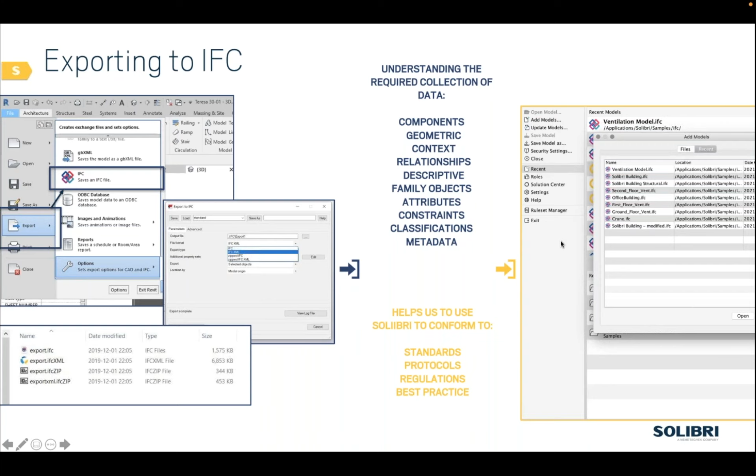So this is a really important slide to consider, because when we get into the Solibri Office workflow, that's the first point: take our IFC and bring that into Solibri. It might be multiple models, we might be doing a federation process here, but fundamentally what we end up with is a Solibri model project, and the project itself is optimized.

We've now created relationships between components. We can use classifications and work within the Solibri environment in a more seamless way with the data we've been given. Some of the initial basic things you can do: visualize, navigate, merge, federation, coordinate our models.

But where Solibri comes into its own is with classifications, fundamentally there to help us identify what we are looking at, see the wood through the trees, and actually be able to identify both components and spaces, no matter what we want to classify in our models.

It could be make the architectural model blue and make the structural model red, for example. I want to see the differences. I want to see where things are poking out. I want to do fire stopping so that I can see the ratings for the doors and the walls. There are tons of different ways that you can classify what you've exported and taken into Solibri.

It's also a huge prerequisite for the checking process, because instead of having to search for all windows and do a clash detection against all doors and all other components in that room, what we can use the classifications for is to already group the windows together based on type, or based on whatever you want to base it on, in terms of the information we've got for the windows.

And we can then run a check that's built based on the classification. So it's not integral, but it's really helpful.

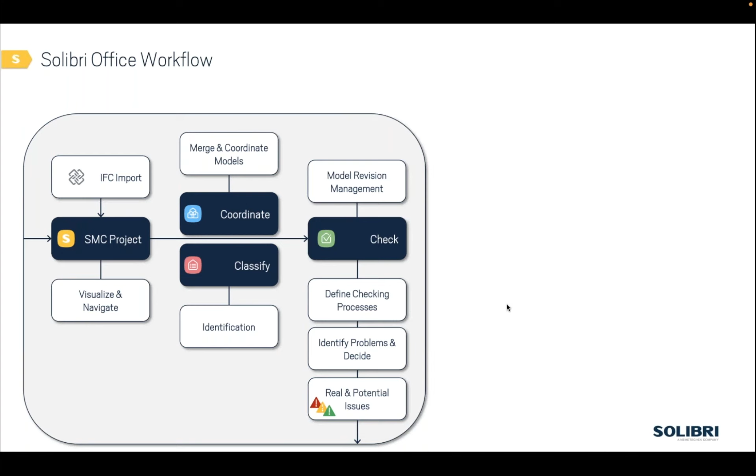Once we've done our checks, found our problems, and found a series of issues, we want to communicate them to people, and you can do that a number of ways. BCF, BIM Collaboration Format, enables you to share the issues you've found back to the authoring tool so that the changes can be made in a dynamic way.

The alternative might be using Excel, which you can also do if you want reports of the bigger picture and a list view of all the issues you found, but that's going to require you to go back into the authoring tool and find those issues manually. So BCF is far more dynamic and far more interactive with all of the tools.

We've also got an API there and a BCF Live connector, enabling you to push the issues you're finding in Solibri out to issue management systems like BIM Track and BIM Collab, for example, so that others in the team and others working on this project can see the value you're getting out of the software.

One of the new things we're working on, and hopefully will have delivered by the end of the year, is a series of new fire stopping rules - we've been working very closely with a big handful of our customers to help deliver what is needed in terms of fire stopping. Egress analysis is already in the software, but I believe there's a few tweaks and changes being made, and this is all to the benefit of our API. Being able to use a third-party developer to deliver these rules in a seamless process and quick amount of time enables us to be far more dynamic to the outstanding problems in our industry.

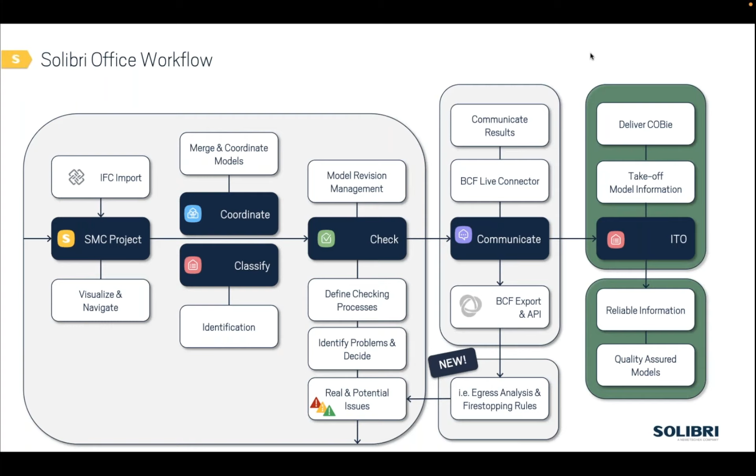So taking us right back to the very, very beginning when I said that quality is not what the client's feedback is, quality assurance is this. This is taking a process, standardizing it, and when you deliver, you're the one telling the customer or the recipient of this information it has been quality assured, and that just de-risks everything to do with your involvement. And this is a very general overview, and obviously we'll get into some detail in terms of what the checking processes are going to be, what sort of identifications can we do with classifications, which I'll jump into in just a moment's time.

So in terms of integrations with other softwares, this is a journey for us. This has been something we've prioritized this year and will continue to prioritize next year. But if any of those products that you're working with and you're curious about the developments that we've made to unlock these integrations, then please do get in touch with us, because this is a huge part of Solibri's endorsement with Open BIM and just trying to open doors and let all stakeholders on a project work effectively with what they're finding in Solibri.

So I'm going to come back to the product family a little bit later, but now I'm just going to jump into the software. So if you bear with me 1 second. Maybe a good time to do another poll whilst this is loading actually. So let me just open this up.

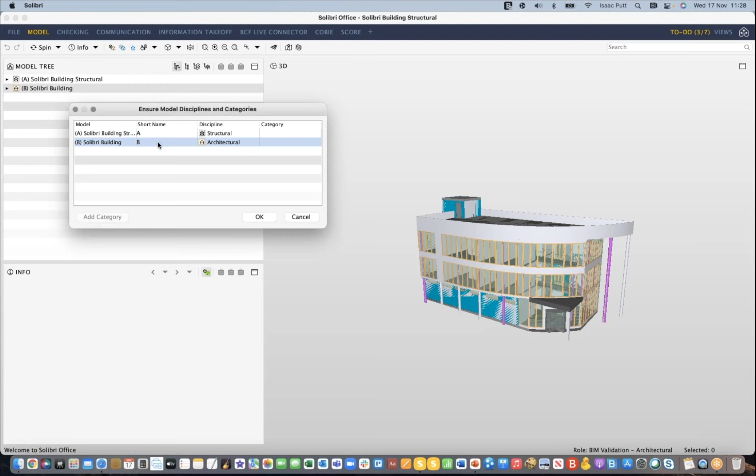So here we go. So it's loaded in our models, and the first thing that we want to do is we want to define the actual models themselves. So this little window comes up and it asks us for the discipline, the category. So in Solibri Building, I'm going to put ARC in here. Notice over in the background in the model tree, we've still got A and B, and we've got the 2 different types. And in here, I'm going to put STR. Now, when I hit OK, it's going to change. And now I have a prefix associated to the 2 models.

So if I go into the detail of these 2 models and I break this model tree down, all of the components actually have that prefix associated to them. So in the columns, we can see ARC on all of the columns as well. So there's loads of ways within Solibri just initially to understand what we are looking at.

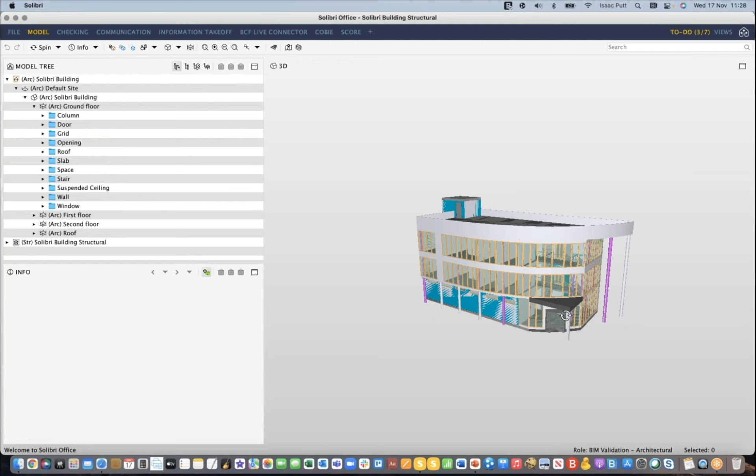If it meant that I wanted to see the ventilation model within the architectural model, I could use the tool up here to hide the roof, zoom in, and for some reason it doesn't want to show it. That's because I've loaded in the structural model and not the ventilation model. Let me load that one in as well. Here we go.

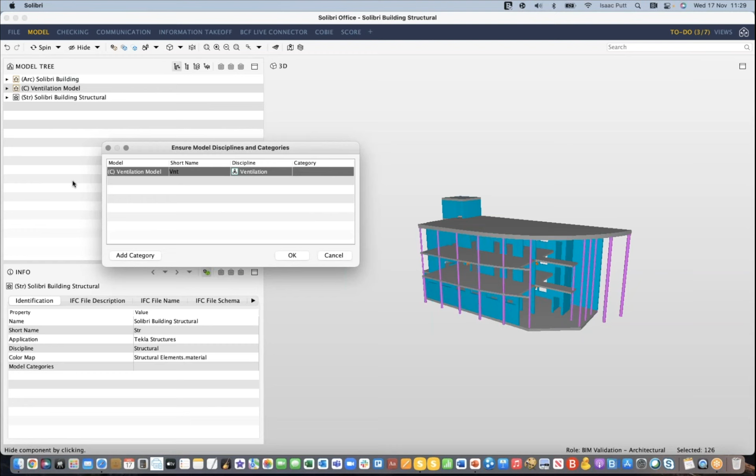I'm going to do the exact same process here. So now I have my ventilation model. I'm going to put a short name on there, and I'm going to change the discipline down to ventilation as well. And now if I want to see my ventilation model, I can. But just going back to everything and doing that same process again, if I hide the roof, now I can see my ventilation model in there too.

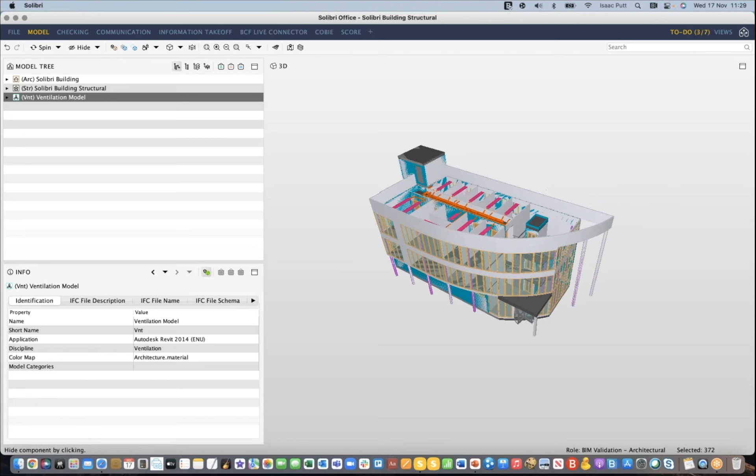And you can check the coordination of this, make sure that things are lined up correctly. As some of you may have noticed, there's probably a couple of issues there already, but nothing that jumps out at me that rules can't fix. So I can understand what I'm looking at here.

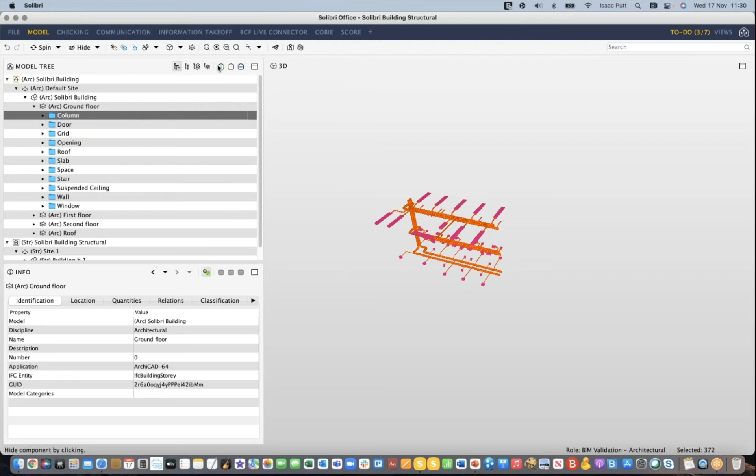There are a few ways in which you can break the model tree down. So if I wanted to see it by actual product, then I could do that as well, and instead of just filtering by the ground floor columns, I could just see all of the columns. But you're not editing and changing any data in here, you're literally just viewing it a slightly different way.

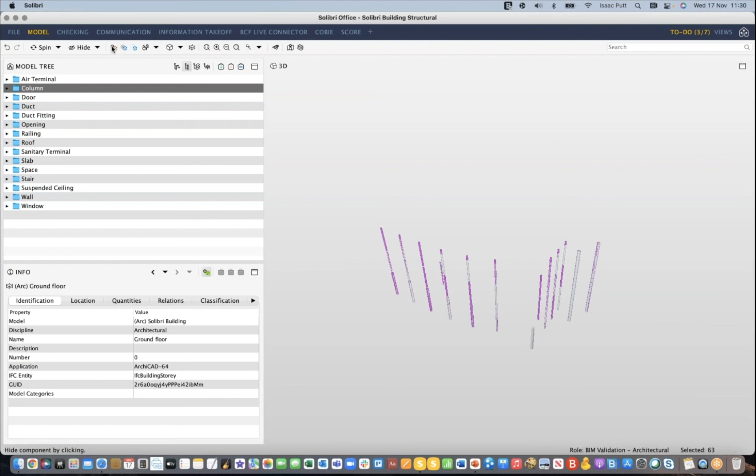And if you want to bring everything back, there's a little brown box up there that enables you to do that. You've got varying standard views, so I can do top, front, right, and quite a lot of basic functionality in here, such as give me the information. So if I click on a component, if I click on this wall here, this little information window pops up, and it gives us all of the data that has been exported into the IFC itself.

So looking for blanks, looking for information that might be missing in here can be done manually, but then you can also use classifications to define if the information is missing as well, which I'll get into in a little bit of time. But you can see where the application was, the authoring tool that this came from. You can see the location, you can see all of the data that's been exported.

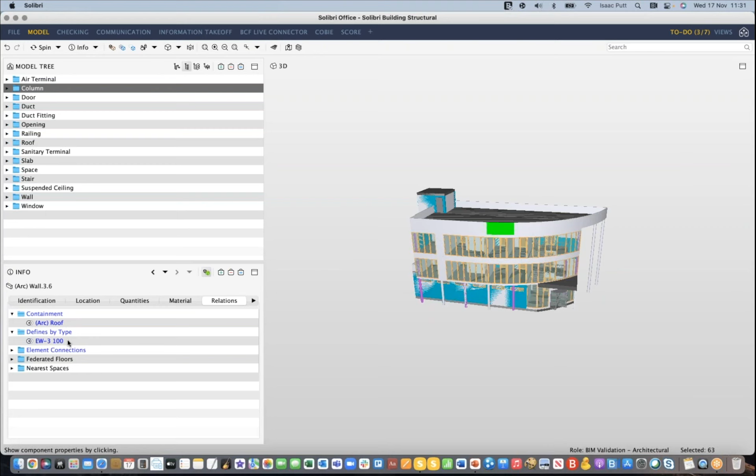But where Solibri gets clever with this is it starts to build relationships between components. So now we can see that the federated floor that this resides on is the roof. We can see that the type of this component is EW for external wall, and we can see the components that are connected to it either side, and they're hyperlinked. So if I click on this one, it takes me to the wall next door, and then I'll just move this back into the middle screen. I've got a control panel, so I can't quite see the entire thing, but we can now see the walls on either side of that.

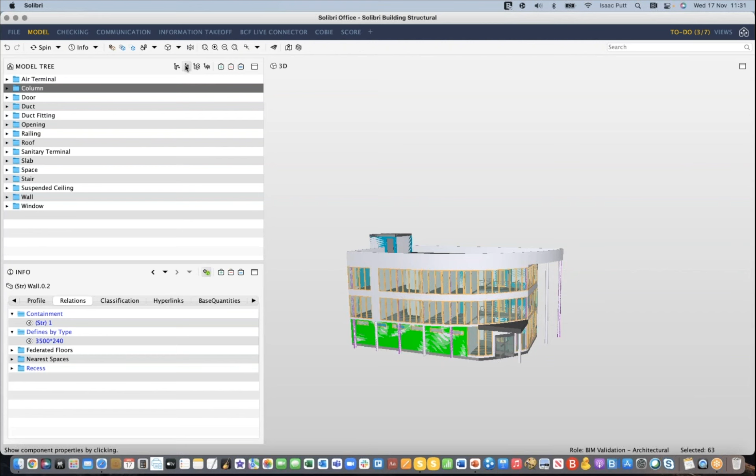And it's fine for looking at components that are touching it on either side, but if I click on this wall at the bottom, the information changes slightly. So now I can see the containment value. I've actually clicked on the structural wall. Let me just take the architectural wall and I'll show you what I mean. So now we've got the containment value of the ground floor. We can see EW for external wall. Now we can see all of the interior walls that reside and touch this one.

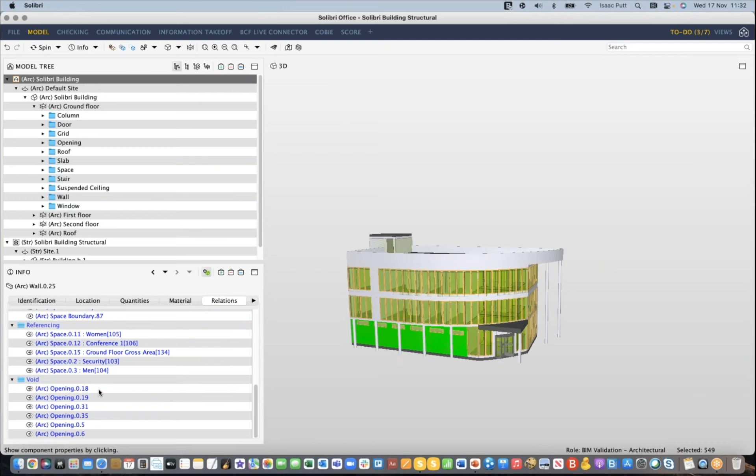We can see the spaces that are associated to this wall, what the spaces are referenced for, and then the voids. So if I click on this opening, it takes me down to the window level, then I can see the filling for the window. So it's just being able to build a picture, basically, and be able to view what we're looking at here with this model in a nice click-through, seamless process in terms of all of the information that we've got.

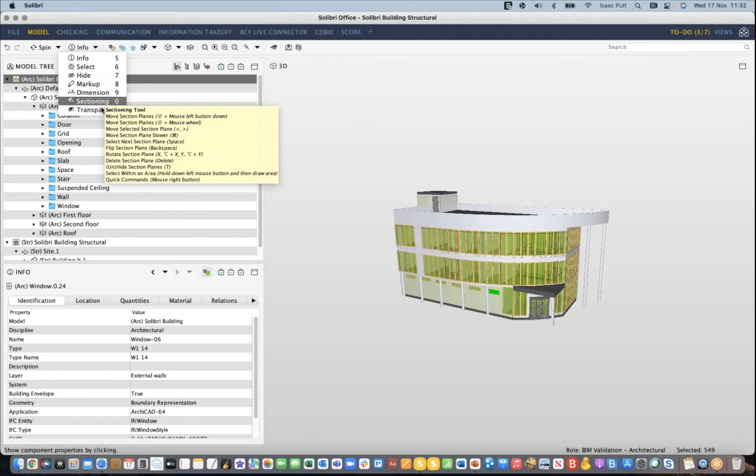So that's the basics of navigating your way through the model. You can use a VR headset, you can use a video game controller, you can mark up, you can do section planes and section boxes in this environment, you can hide components, you can bring everything back, and you can just make it look the way you had it when you first imported it without making any changes or mistakes.

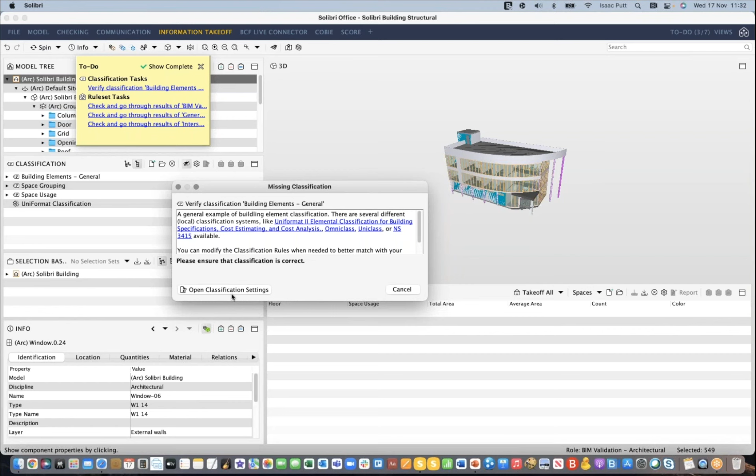So the next thing I want to show you is how classifications work. This is next level in terms of what I've showed you already. So this classification here is asking me to verify the building components for our architectural model. So if I open up this classification, I'll explain why it looks this way. So this information has been preset before we've imported the models. We're working to a naming convention here. We are specifying that if a column equals one of these types, then the name of it is a column. And that's the way that it works. Doors of these types will equal either an interior or an external door.

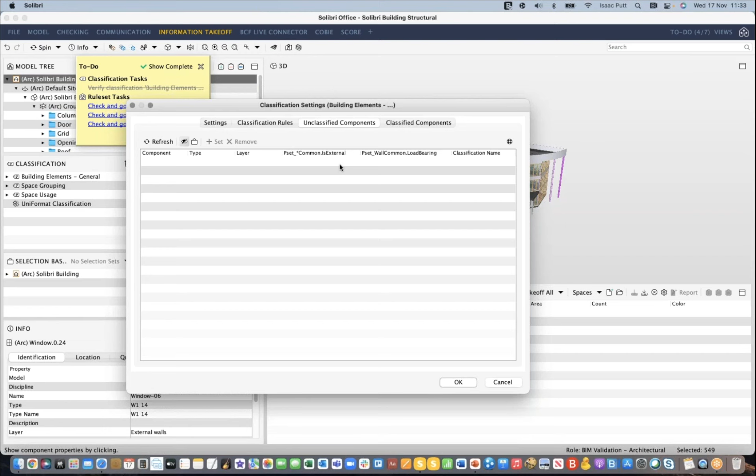Any components that are either new or incorrectly named in this model, that aren't in my preset classification, will fall into this list here, the unclassified components list. So we can already do a check to say all of our architectural components, if they're not classified or if some of them aren't classified, let's name them properly. Take a screenshot of that, get that back out of the software and get it back into the authoring tool, or you can cater your classification to take the new components if it's not a mistake and it's actually supposed to be there.

The way the rules work, nice and simple. It's just you're working your way through each component and classifying them based on this level of information: type, layer, pset values. And we can color coordinate based on what they are. So this is how the classifications are built and can be so different from each other. You know, in this case, I'm looking at all my architectural components. In the next classification, I might be, as I said before, cross-checking my architectural model with my structural model, or doing the fire stopping and all the different things that you can do.

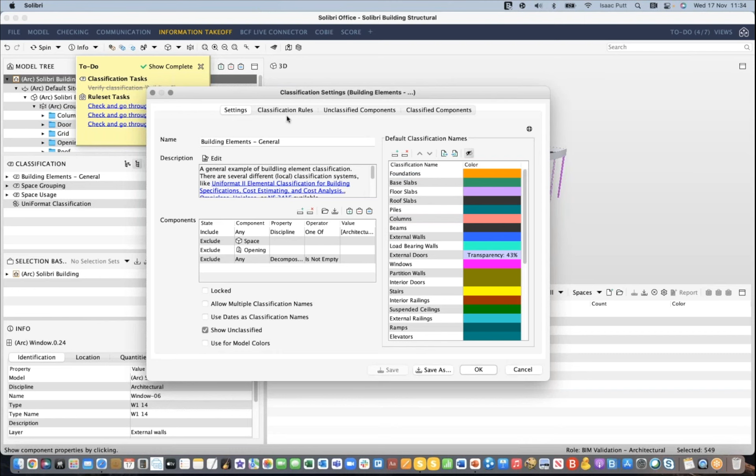So we're including all of our components from our architectural model, and we're excluding spaces and openings. You can do classifications of spaces if you want to. Anything that you have within your model, you can classify as such. So that's how the classifications work, and the rule sets that I'm now about to show you, a few of them are based on classifications. So that all pulls together nicely. You can see space grouping and space usage here, and you can drill in some of these classifications and see what the spaces are to be used for as well.

So let's get back into checking. The rule sets is the group term, so there are a series of rules within them. I'm going to handpick some of these so that we can go into some of these today, and I'll show you what it's all about.

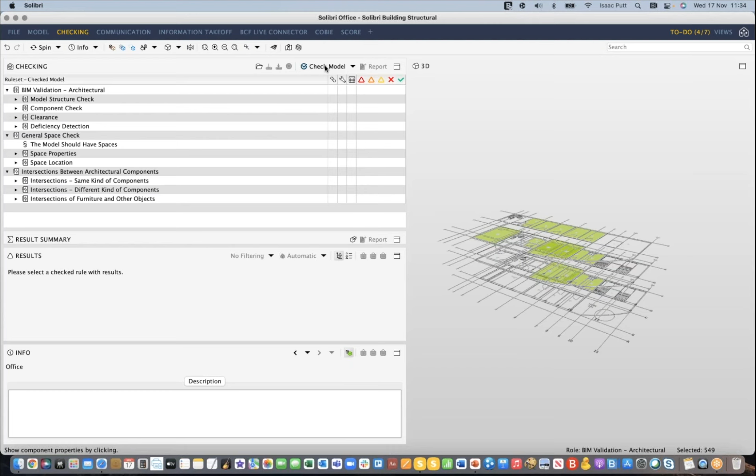I'm just going to check the model. These rules have been defined. We know they work on this model. This is our demo model, so it should work. Let's go through some of these. As you can see, as it's doing it, it's basing the results on severity, which is what I mentioned to you earlier. Some things have been automatically accepted and some things have been automatically rejected.

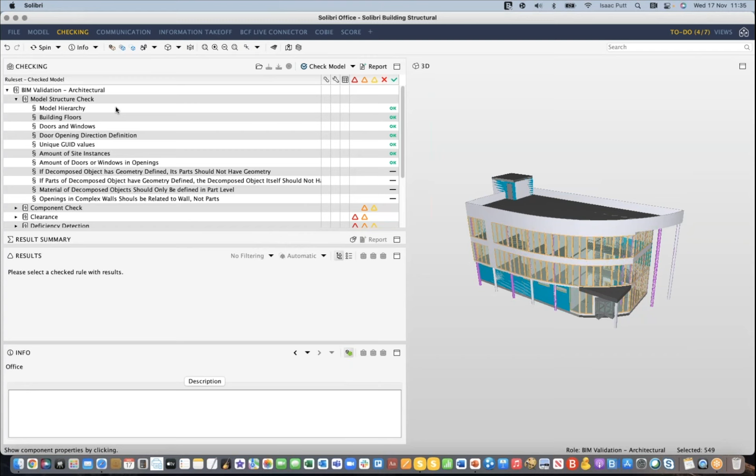So let's go into the model structure check. And this is basically just a nice, simple, standard rule that says, make sure it's got a hierarchy, make sure it's got doors and windows, make sure there are unique GUID values for all components so that there aren't two duplicates of the same. As you work your way through, I'll go straight into clearance. So clearance in front of windows.

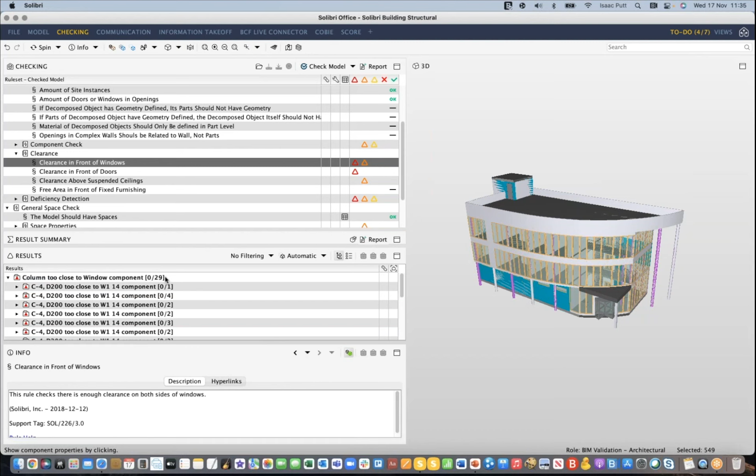By clicking on the rule itself, we've got a series of results below. Rather than seeing all of these issues listed out, it's grouped them based on what it's found. So it's found a high severity issue and a moderate severity issue. And if I go into the column too close to the window component, there are 29 instances here where the columns are too close to the windows. What it's done for us is it's put these nice dimension markers on screen. You can see the columns here and the space that it's actually checking for.

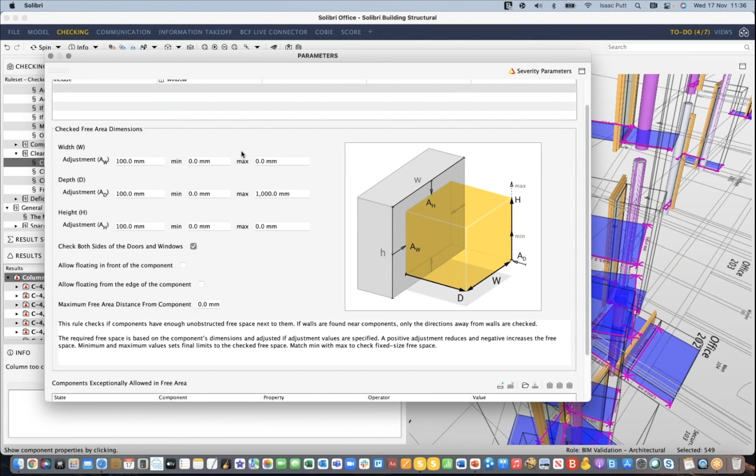If I just go into the actual rule itself, I'll open up exactly what it's doing. So in this case, this is how the classifications have come into play. We're including windows, nice and simple. This is the space, the free area space surrounding the component that's been defined. We want to check both sides of it. And you can specify a little bit of information for those that want to understand a little bit more in terms of what it's actually doing.

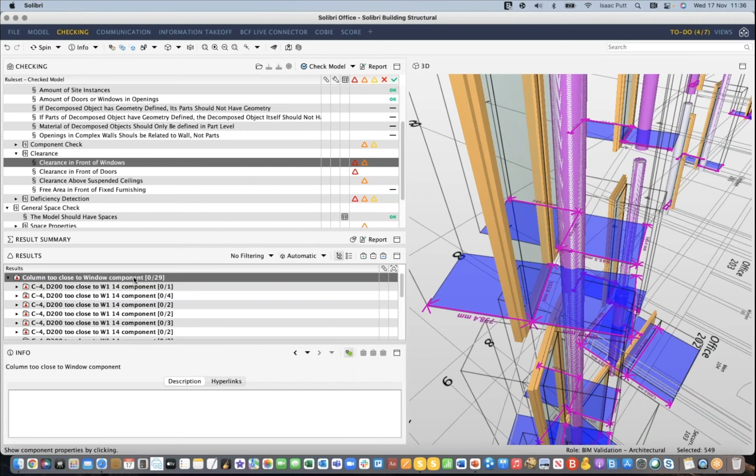And then we can have exceptions in there if we know that some components can live in that space. And in this case, there aren't any. So we're just checking that space around both windows, and it's found the columns protruding through, 29 of them, in fact. So the way that we would communicate these 29 issues out to people, typically, is get it into Excel if it's a clash. This is a soft clash, so this isn't actually physically hitting the window. This is just looking at the potential function of that window, and defining that there could be an issue.

What we now want to do is create that BCF I was talking to you about earlier, that BIM collaboration format. So in this case, this is basically it. This is the way that it looks as exported from Solibri. If you're using the BCF Live connector, then you can have these issues automatically taken into the BCF Live connector, and in real time upload them to an issue management system. But to do it manually, so I can show you what's going on, we can define the description, which is based on the top level.

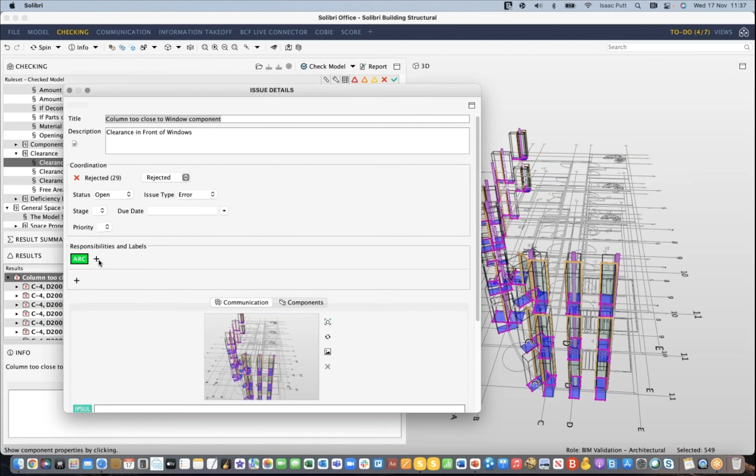So it's a little bit technical, but if I did a description on any one of these individual examples, then the description would give me the physical dimensions and physical issues of that issue. But because we're grouping things, we're just going to get a group description, if that makes sense, clearance in front of windows. We're going to reject this. We can set a status of this. We can set a due date. We can assign this to a team. We can put email addresses in here. I can put a name in here if I want to.

I can see an image. If I wanted to give an example, such as one like this, I can add more images in here, and it will work its way between the two. So you can get some nice animations out of some of these as well. And then it will also list me all of the components that are related to this issue. And as I click on these, it's hyperlinked, so it will work its way through. And that is how seamless it would be within the authoring tool to be able to locate some of these issues and have them fixed.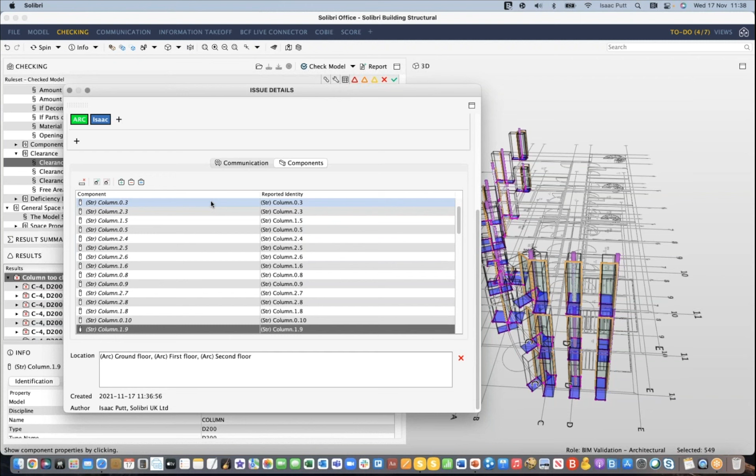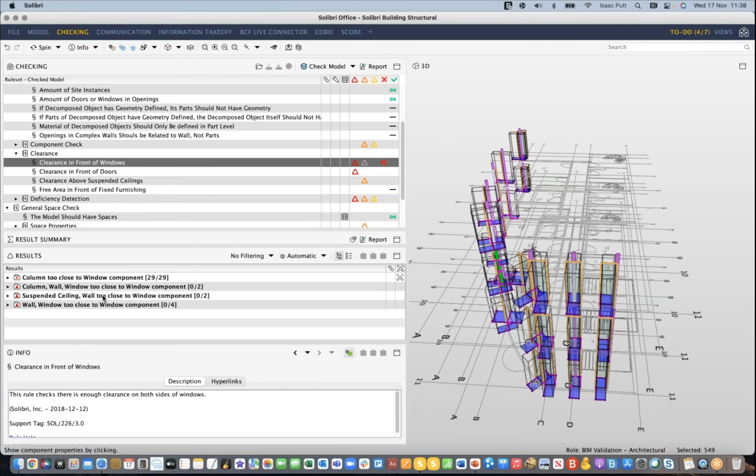It's going to tell me where these issues are located, and the fact that I actually made this slide myself. You don't need to hit any save buttons each time, because that would just take too long. So you just close it and it automatically saves it. And if I wanted to create a presentation, I could do so in the communication area, but I want to spend a little more time going through some of these rules and what they're doing. So there are other problems in here, but I won't spend too long on the same rule. Clearance in front of doors, sorry. So you can see the same thing.

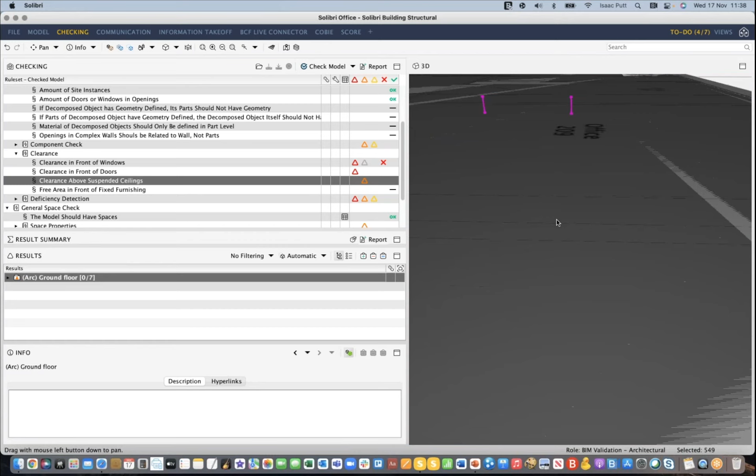So in this case here, you can see that it's checking for the clearances in front of doors. I won't bother doing slides each time because that just takes too long. You've seen the process now, but this one is checking the clearance above suspended ceilings.

So if I just show you, there are 7 suspended ceilings. If I want to make that a little bit clearer, I can actually click through these and it will highlight them for us. I can highlight them by doing it here as well.

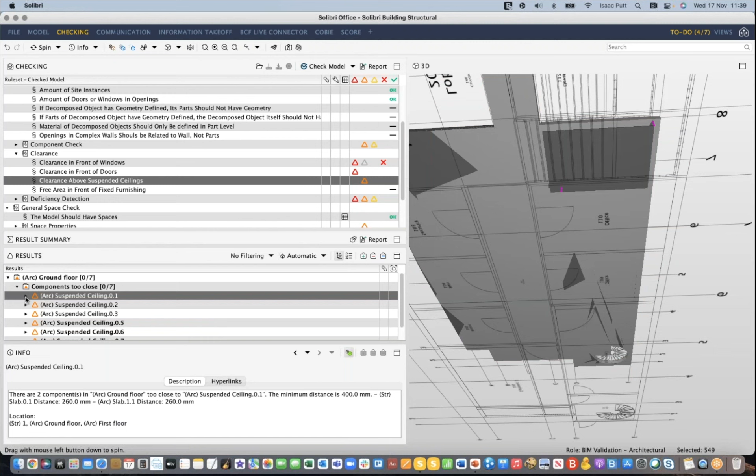That's my suspended ceiling. You get down to the detail. This is the nice thing about it, is you can actually start to work your way into the detail of the rule by just clicking through. So you get the bigger picture, and then if you want to see the real details, you can do exactly what I just did there.

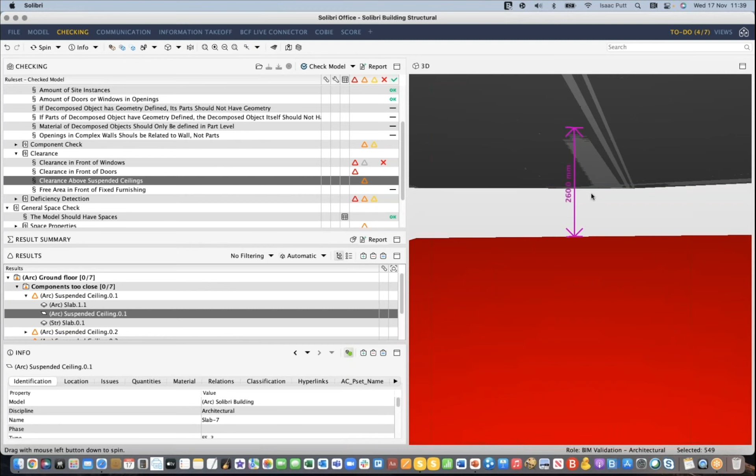So this is that single suspended ceiling, which is too close to the slab above. And there are little dimension markers. This is one of the hardest to see, so let's see if I can do it. There you go, 260 mil is the gap. Now, okay, that was a little tricky to find out, but I don't need to do that.

That's just for my own sanity. What I can do is right click on this rule, add a slide, and I can do the exact same thing. So ground floor, and I'll show you, this is the group level, clearance above suspended ceilings. But if I did this on an individual level, such as the one I had open, and I right click, add a slide, now, sorry, bear with me a second.

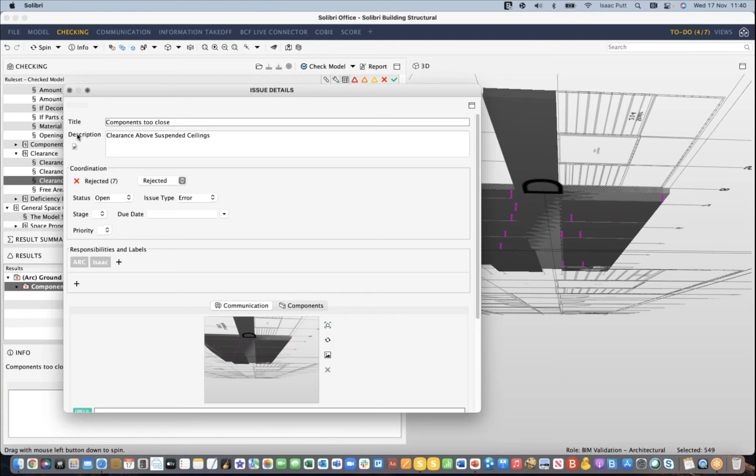Now my information's changed. So clearance above suspended ceilings, there are 2 components listed in this example on the ground floor, and the minimum distance is 400 mil. So you don't even need to articulate what's happening here. It tells you, and it can pre-populate that information for you.

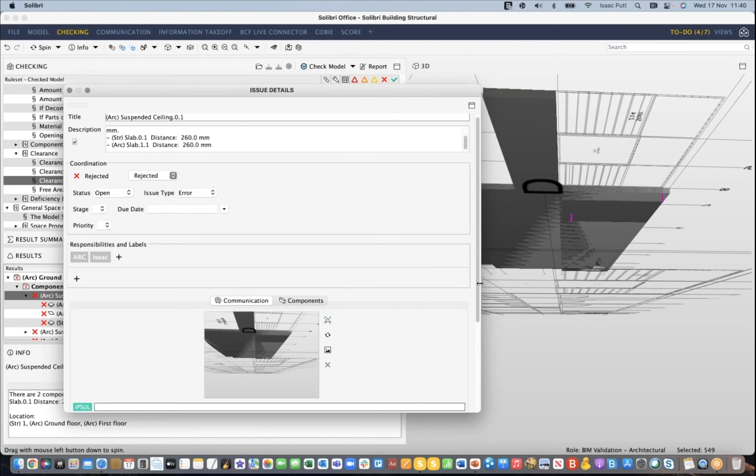So we reject this, we can then communicate this to somebody again. It's not the best image, but you can actually see the components listed here as well. I've actually got my structural components in there as well, which isn't something I normally do, but it's there.

So there's a ton of different rules in here. Let's just have another quick look at some of this other stuff. I won't spend too long on these.

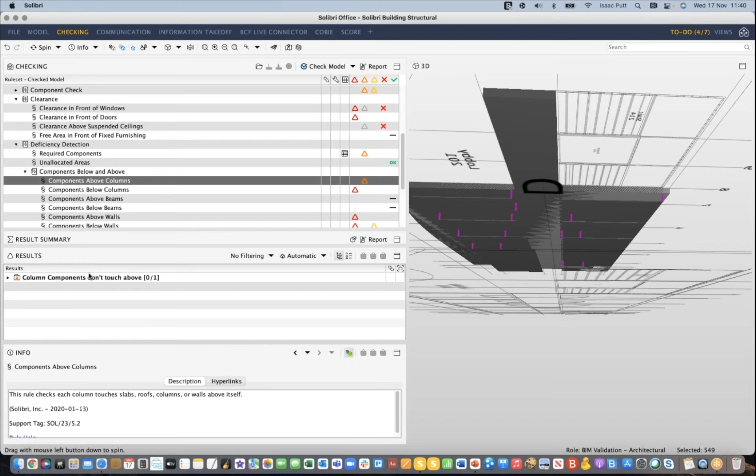So let's just check the components above columns. These columns are supposed to be supporting the slab above, and it's floating and they're not doing anything. So again, same process, I'd add a slide and I'd put that into my communication window because that's a bit of an issue. This is more sort of building regulation standard, this one.

So this is checking that there must be a swinging door next to the revolving door. One thing that this rule is doing, which is really nice, is it's actually created a radius around the revolving door, which you can define both to the space it resides in or to the entire floor.

So if I just show you the parameters of this rule here, what it's saying is check the horizontal distances between these two components, and it's allowing a maximum distance of 3000 mil. And what it's doing is it's checking the IFC door panel property, which is revolving, and it's basically saying search for a swinging value within that proximity of it.

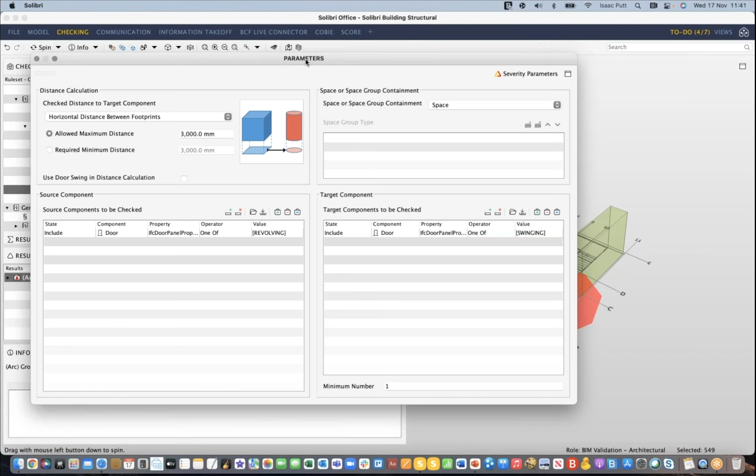Really simple. You know, when you're looking at creating some of these rules, they don't always need to be really difficult. This one here, and I'm no expert, could be defined relatively easily based on the information I know from my model itself. And that's the distance that I've got.

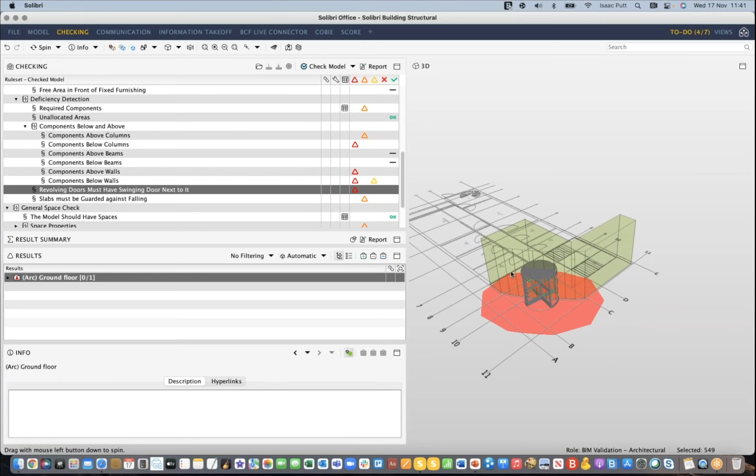I could exclude spaces, I could include spaces. I could even say, okay, if you can't find a swinging door within 3000 mil, where's the nearest swinging door, in case it exceeds that space. But nice and simple, that's exactly what that rule is doing.

So let's go into some more detail in here. So in this case, we've got some spatial validation based checks. This space has not been validated correctly, it's not been specified. You can see that the pipe shaft down here may have initially been a bit bigger, or there must have been something that was in this space that enabled the office space here to have to change. And what it's doing is it's not taking the whole global space of that area.

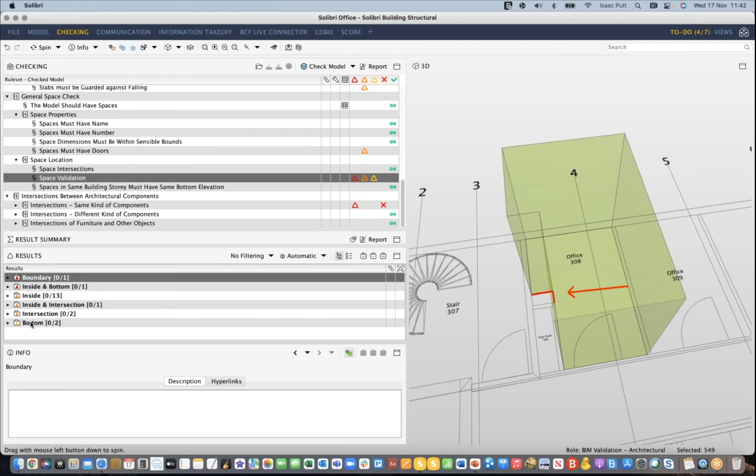It's a very small scale, but on a bigger scale that could be quite an issue, especially when you're thinking about repurposing rooms and whatnot. So there's a series of other ones in here, the exact same thing. This is basically just saying that the component is blocking the space, and that space should be longer in effect.

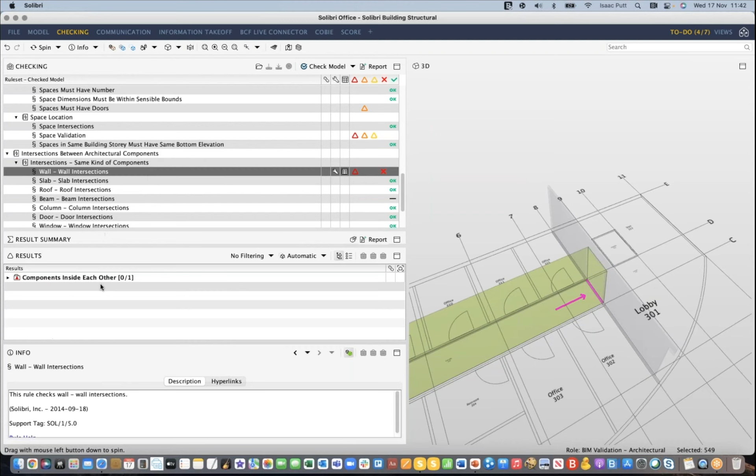So I'll get into this one. This is a nice visual just to show you, and I'm not going to show you too many other examples, and I am going to go into the rule set manager.

So this one here was actually based on a customer request. They said to us, our wall quantities are not marrying up with what they should be. And this is what they had, and it's a wall within a wall, basically.

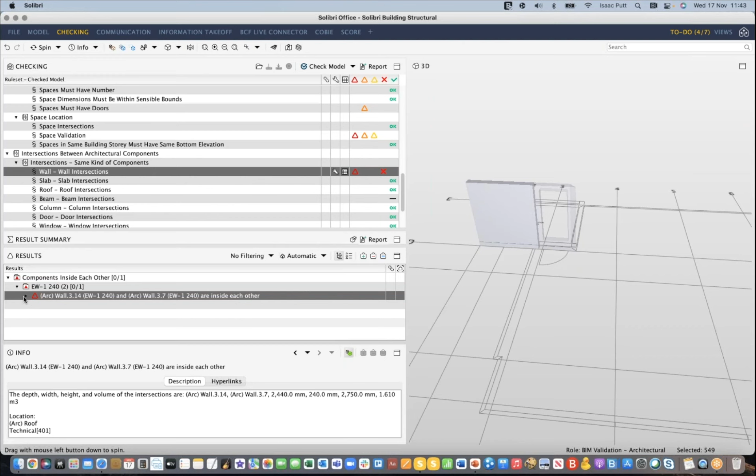So if I go down into the detail, you can see that wall 3.14 and 3.7 are inside each other. And if I just scroll a little bit further down to one of these components, you can see how it shimmers when you click on it. Visually, very, very difficult to see.

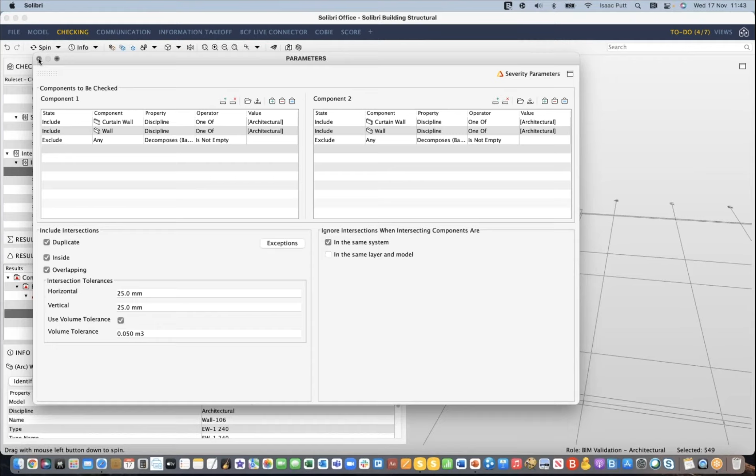Using a rule like this from Solibri enables you to just instantly find it. You don't necessarily have to say that it's fully inside of it either. You can actually specify the tolerances. So you could say that it must be a duplicate, or it must be inside, it must be overlapping, and you can specify the actual physical tolerances themselves. So really nice little rule just to make sure that your quantities are as they should be in case there are components inside of them.

So this is a whistle-stop tour of some of the rules that you can see have been run on this model, but where I want to show you is the rule set manager itself, because in here we can see what all the rules are, and this is all out of the box.

So I say to a lot of people, you can either look at what the software can do, and you can see, okay, great, there's accessibility based checks for doors, ramps, roofs, stairs, windows, etc. But you might have your own preference, your own components, and your own ways that you would want to run what the rule is doing on your own model. So don't feel that this is limited to those components, don't feel that what you're seeing on screen is limited in any way, shape or form to what it's checking as an example. It is just an example.

So you can customize these, you can create your own workspace down here for what you want to check for. Component distance, I showed you this one, you specify the components that you want to check. You've got the escape route analysis, which is obviously part of what I showed you earlier.

There's loads, model comparisons. So as you're working your way through the life cycle of a project, things might be changing, being added, removed. You're working with subcontractors or companies that are saying, yeah, that's fixed, that's fixed, but you might have actually created another problem. So using the model comparison enables you to take revision A versus revision B and check to see what's changed, both in terms of components and in terms of spaces. And we do find that components have been added, but the naming of them hasn't been appropriately assigned, that sort of thing. So there's real value in just being able to check that at your varying stages.

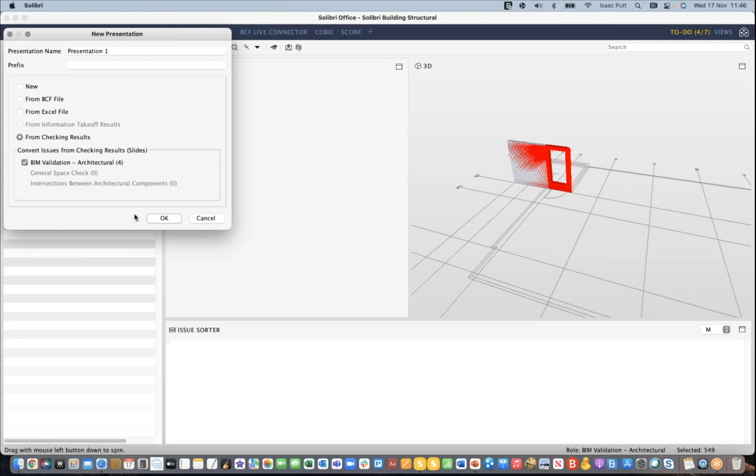Communication, this is where I create that presentation from my checking results. So I took 4 just BCFs that we built together. Yes, okay, there are some duplicates in there, so this is another part of the process to just verify what we're seeing. But anything that we want to export, tons of customization work can be done in here in terms of who you're sending the BCFs out to.

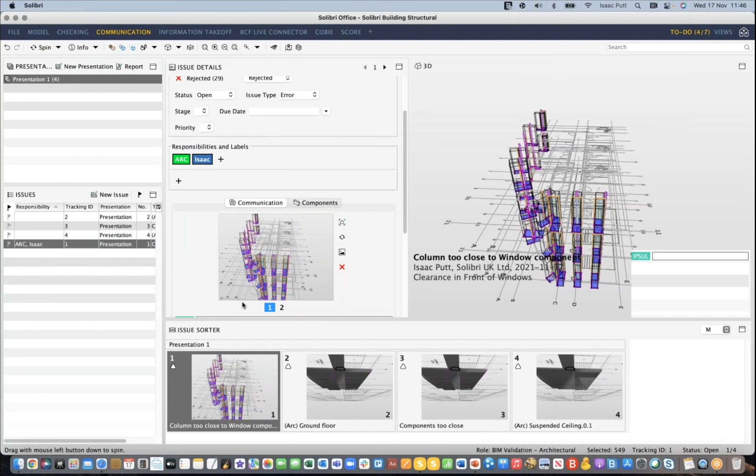It doesn't have to all be in one presentation. You can split this out so that different people you want to send it to can receive their own presentations. You can go back over your notes. This is the BCF snapshot we took earlier, and you can export that through BCF and report it.

Or you can take an export of this in Excel and have a summary report. It's your preference, really. But information takeoff is the last part of my demonstration. I can probably do this in about a minute or two. Really what this enables us to do is both design verification and take information out of the model.

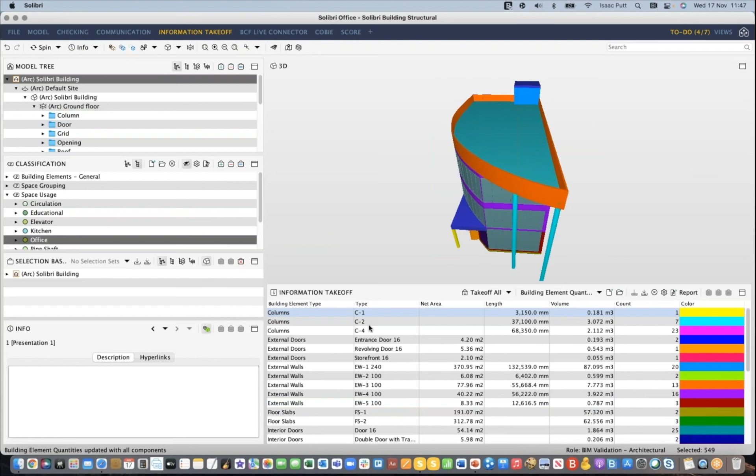So take off all of my architectural components, and there they are. The leftmost column in all of Solibri is your filterable and sortable column. So if I wanted to sort by type, I could just drag type over here, and that's exactly how I would sort it.

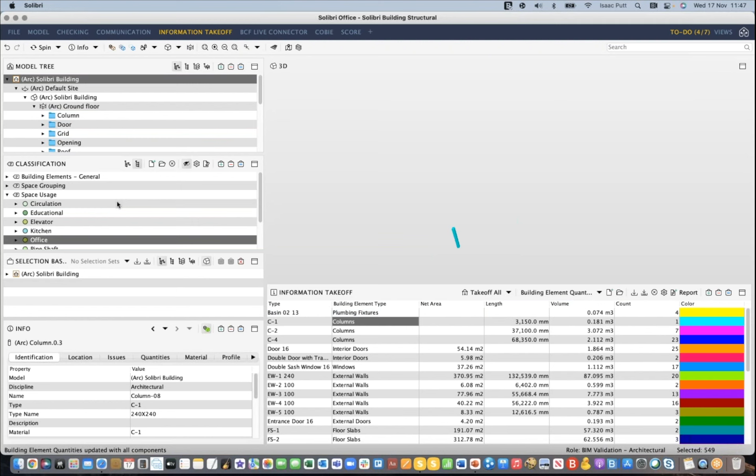So there's some really nice ways of being able to build very quick takeoffs. You could do takeoffs based on classifications that then pull through to your selection basket. So if I used this classification for columns and added it into my selection basket, I could then use the takeoff to take off the building element quantities of my selection, which in a summary would give me that information.

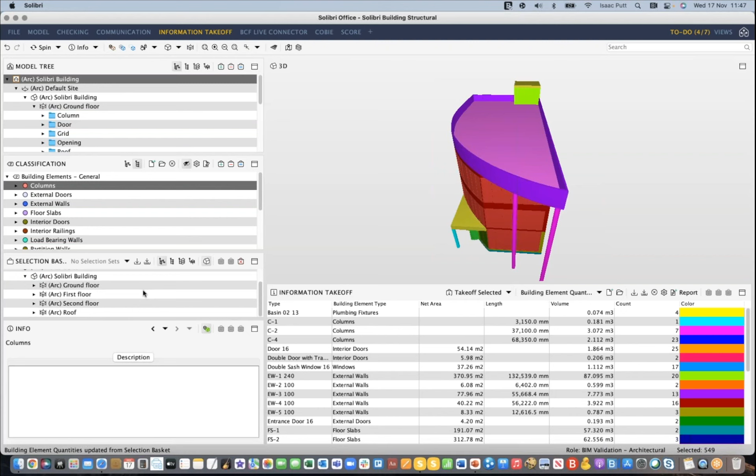Hang on, it might all be in there. Nonetheless, I'll come back to that. Teething problems, but it's really simple, and you can export that information out.

I could do the same for spaces as well. I won't do takeoff selected, I'll do takeoff all in spaces, so I can show you how that works. I can see all of the ground floor spaces here, but if I wanted to see what they're being used for, I could just sort by the circulation spaces too. Really nice and simple ways.

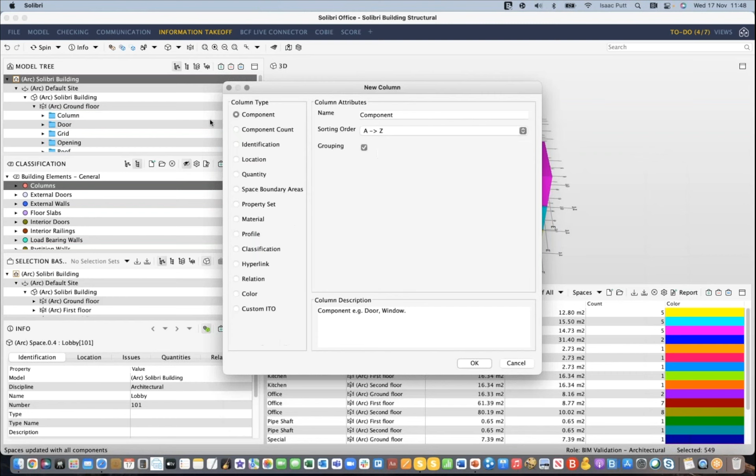You can do tons of different things within the information takeoff area. I'll show you - when we go to add data into here, you can just see the breadth of data that you can pull into this information takeoff. Fundamentally, the COBie deliverable uses ITO more than anything else, simply because of the way they build the picture for the COBie spreadsheets.

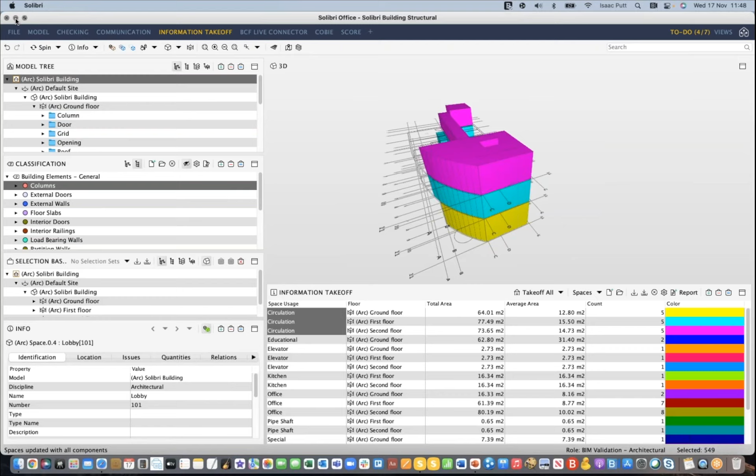But that's a whistle-stop tour of Solibri Office Workflow that's harmonized with the presentation that I showed you earlier.

So in terms of fitting the bill, our price model is flexible enough that you don't always have to spend an arm and a leg, but sometimes if you spend just a little bit, your return on investment, as you've seen from what you can get out of the software, could be tenfold. So this is what I was going to say.

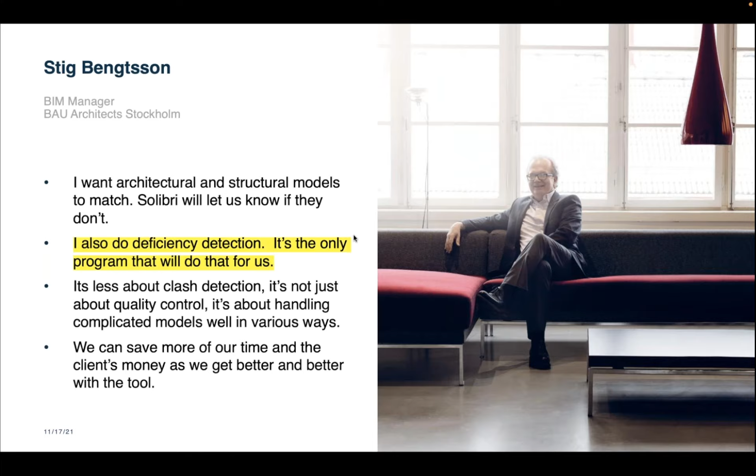Aside from what customers are saying about the use of Solibri, from our perspective, it's a hand-holding product. It's not a box shifting tool. It's not something I would sell you today and say good luck. It's something I'd be more than happy to support you on in your journey throughout 2022 and continue on. It's a very capable piece of software, and sometimes when things are so capable, it can leave you feeling like you've got a mountain to climb.

One of the things we always say to people is think big but start small, and we'll take quick wins out of the software to give you some productive return on investment. But over time, it's a cultural change, and we find that with almost everybody we work with that really gets stuck into Solibri, it culturally changes their company and the way that they work. So our support is there to help with that.

We have another workshop series playlist on YouTube, which goes into the detail of pretty much everything I've gone into today. It's hosted by myself and our technical support team. We go into COBie in more detail, model checking in more detail, classifications, information takeoffs, the solution center for management of licenses, everything you'd need to get a better understanding of how Solibri works. Next year we're going to continue that on as well. We've got one more session this year on the 9th of December, on how to interrogate and annotate those models. And that's everything from me.